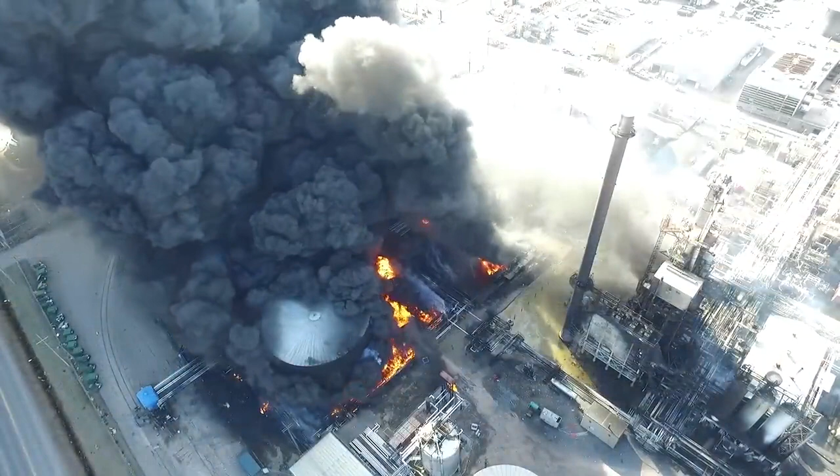April 26, 2018, the Superior Refinery in Superior, Wisconsin. A large explosion erupted during a maintenance shutdown, puncturing a tank of asphalt that spilled into the refinery. The asphalt later ignited, causing a huge fire. The incident injured 36 workers, caused roughly $550 million in damage to the facility, and released 39,000 pounds of flammable hydrocarbon vapor into the air.

Over 2,500 residents of the city of Superior were evacuated from their homes, and the city of Duluth, Minnesota, issued a shelter-in-place order. Refinery shutdowns, as well as startups, can be particularly dangerous because processes are not in normal operation mode. Our investigation found that critical safeguards were not in place during this shutdown, and that the procedures followed at the refinery were not correct.

The result was a massive explosion and fire that injured dozens of workers, caused hundreds of millions of dollars in damage, and threatened the surrounding communities. The explosion and fire thankfully didn't compromise a nearby storage tank that contained highly toxic hydrofluoric acid. But the CSB considers this incident to be a serious near miss involving HF. If hydrofluoric acid had been released, this could have been much worse.

Shortly before 6 a.m. on the day of the incident, operators took steps to shut down the refinery's fluid catalytic cracker, or FCC unit, for periodic maintenance and inspection. The FCC unit uses heat and a solid catalyst to break or crack heavy hydrocarbons from crude oil into smaller hydrocarbons, which can then be blended into gasoline and other products.

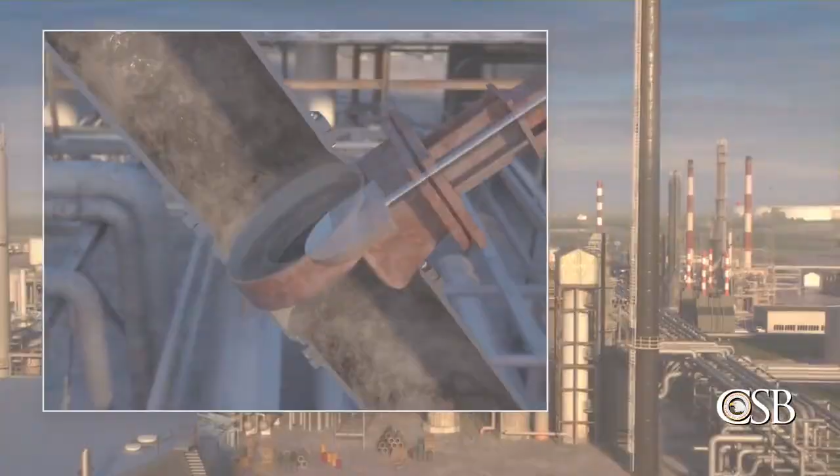To initiate the shutdown of the FCC unit, refinery workers stopped the flow of hydrocarbons to the reactor and closed the two slide valves connecting the reactor to the regenerator. Circulation of the catalyst stopped, but one of the two slide valves was eroded. Catalyst from the reactor fell through the valve to the regenerator, leaving an open path for air or hydrocarbons to flow between the two pieces of equipment.

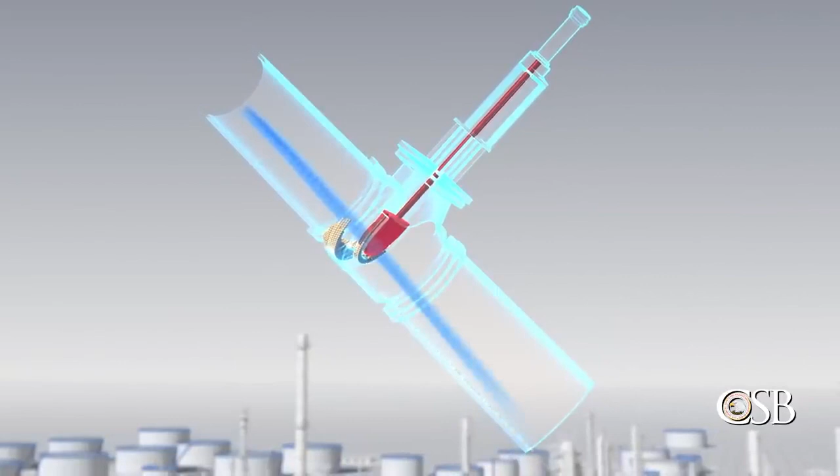Without other critical safeguards in place, air from the regenerator flowed backwards through the slide valve into the reactor. The air then moved into the main column and other equipment downstream of the reactor, where it formed a flammable mixture with hydrocarbons. At approximately 10 a.m., the hazardous mixture of air and hydrocarbons found an ignition source, and there was a large explosion.

Debris from two vessels flew into the air. One piece traveled about 200 feet and hit a large above-ground storage tank, puncturing the side of the tank and releasing hot asphalt. Asphalt poured out of the tank over the containment berm and into the refinery's operating units, where it spread along the ground.

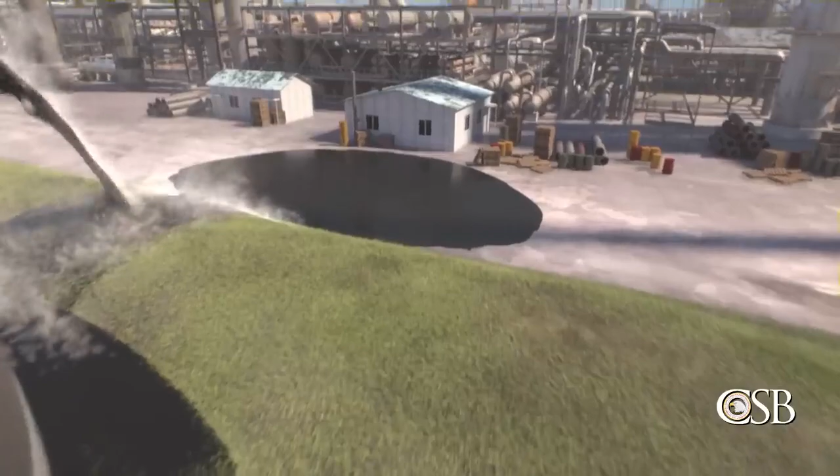At around 12 p.m., the released asphalt ignited at the storage tank and a fire broke out. The fire traveled along the stream of asphalt to the refinery's crude and FCC units. The fire produced a huge plume of black smoke, leading to the evacuation of a portion of the city of Superior. Typically, this type of asphalt fire can burn for days.

A plan to extinguish the massive asphalt fire was developed by the refinery's emergency response team. The refinery began to address the fire together with the Superior Fire Department. They used a combination of dry chemical fire extinguisher and water to attack the fire from multiple directions and surround it within a containment area.

With the fire contained, emergency responders were able to put out the asphalt fire at around 7 p.m. The asphalt fire had been extinguished in a matter of hours, as opposed to days as had been initially anticipated. The evacuation order was lifted, and Superior residents were allowed to return home. Nevertheless, 36 Husky employees and contract workers sought medical attention for injuries.

The Chemical Safety Board launched an investigation and identified 6 safety issues that led to the explosion and fire. They are: transient operation safeguards, process knowledge, process safety management systems, industry knowledge and guidance, brittle fracture during extreme events, and emergency preparedness.

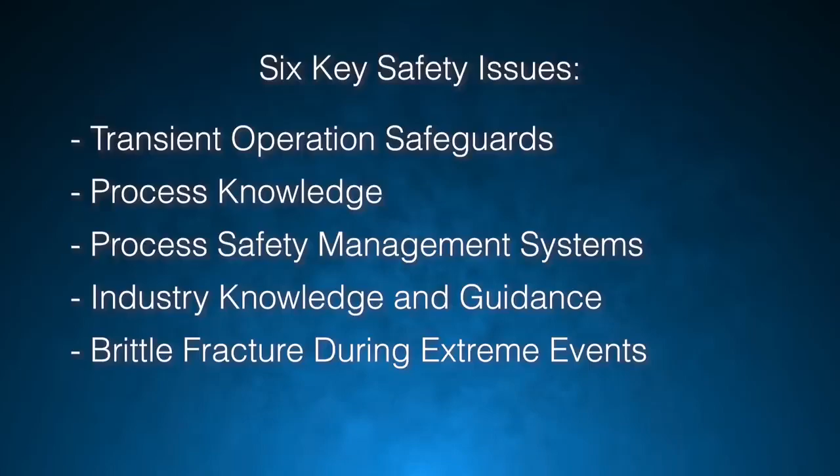The first safety issue is transient operation safeguards. At the time of the incident, the Superior Refinery was shutting down the FCC unit. Shutdowns, like startups, standbys, and emergencies, are known as transient operations, meaning activities that take place outside of normal process operations. Transient operations can pose unique hazards that are not present during normal operations.

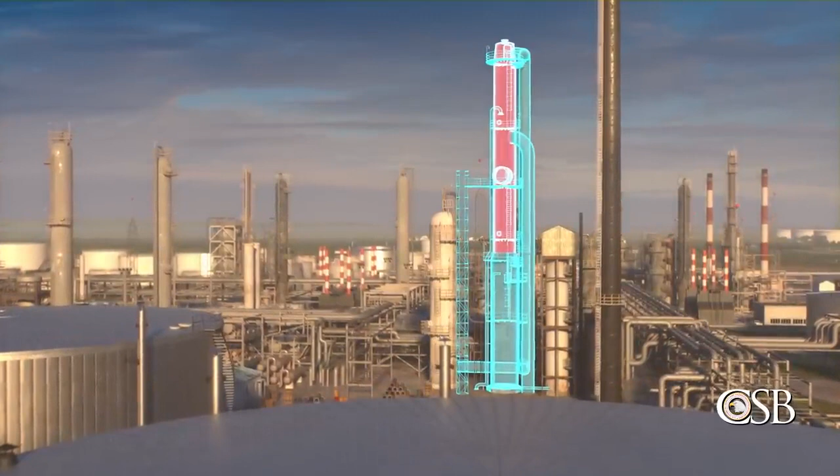An FCC unit presents atypical hazards during transient operations because air and flammable hydrocarbons are present within interconnected equipment, which increases the likelihood of an explosion. Therefore, during the shutdown of an FCC unit, certain FCC-specific safeguards must be in place to ensure that air and hydrocarbons do not mix.

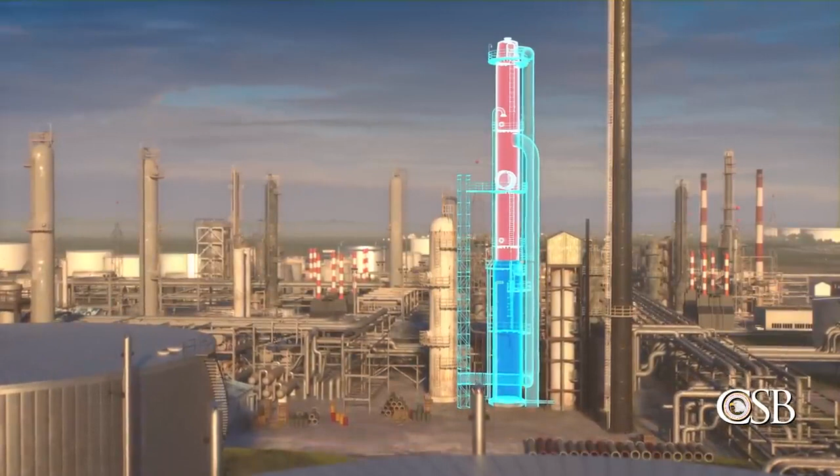The CSB found that at the Superior Refinery, these safeguards were not implemented or were ineffective. One such safeguard is to create a reactor steam barrier. This is done by injecting a large amount of steam into the reactor, creating a higher pressure in the reactor than in the connected equipment. This prevents air from the regenerator from flowing into the reactor, where it can then enter the main column and other equipment on the hydrocarbon side of the process.

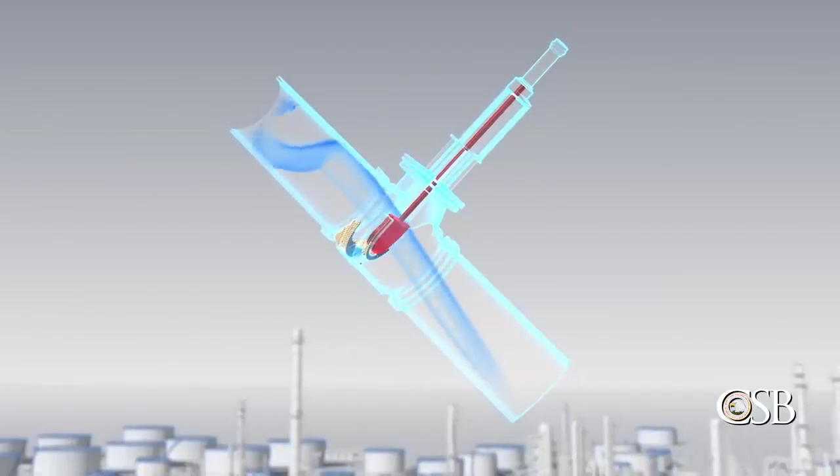However, Superior Refinery's shutdown procedure did not call for a reactor steam barrier, but instead instructed the board operator to maintain the regenerator at a higher pressure than the reactor at all times. Following these instructions set the refinery on a path toward disaster, as this hazardous pressure differential ensured that air from the regenerator would flow into the reactor and onward into the hydrocarbon side of the process, where a flammable mixture formed.

Another critical safeguard that should be in place during an FCC unit shutdown is to use natural gas or nitrogen to purge air from the main column to the flare system to prevent oxygen accumulation inside the equipment. But the CSB found that even though Superior Refinery had the ability to purge air out of its main column, the refinery had not incorporated this safeguard into its operating procedures for transient operations or its operator training program, so it was not done.

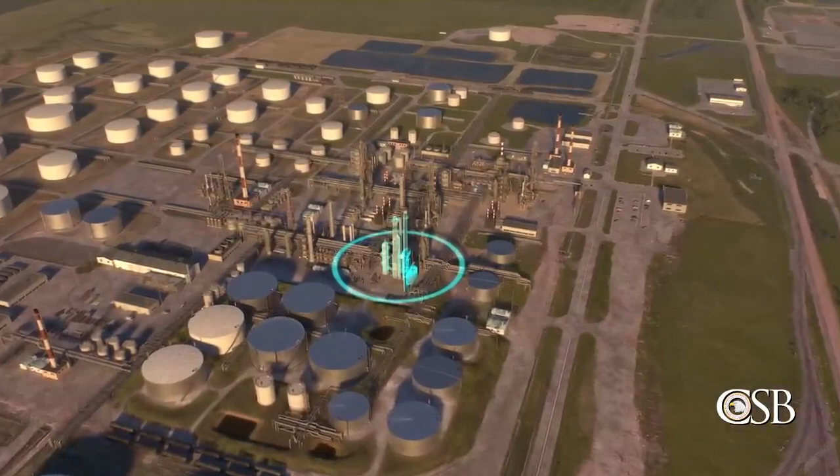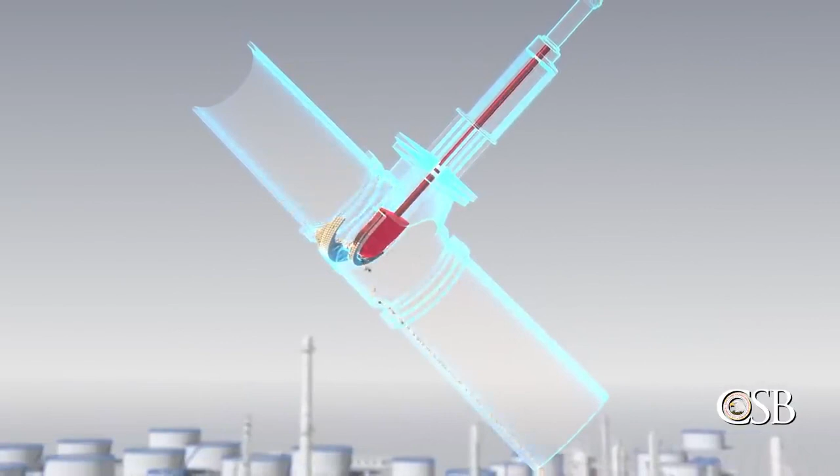Instead, the refinery overly relied on the catalyst slide valves to keep the air and hydrocarbon systems separated during the shutdown. But slide valves are designed to control flow of catalyst during normal operations, not to prevent flow of air and hydrocarbons during a shutdown. And one of the slide valves was eroded after years of use. Therefore, without other safeguards in place, air was readily available to pass from the regenerator through the worn slide valve into the reactor and onward into the hydrocarbon side of the process.

During transient operation for any process involving flammable materials, operators need to understand the potential for air to enter and accumulate inside equipment. Written procedures should be in place that outline safeguards meant to prevent air and hydrocarbon mixtures, and operators should be trained to understand why those safeguards are critical.

To that end, the CSB made a recommendation to the new owners of the refinery, Cenovus Energy, to establish safeguards to prevent explosions in the FCC unit during transient operation and incorporate these safeguards into written operating procedures.

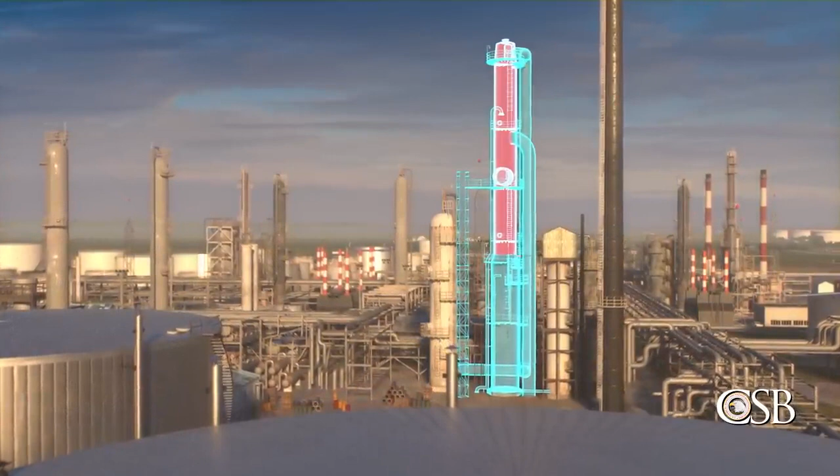The second safety issue found by the CSB is process knowledge. The CSB found that throughout the history of the Superior Refinery, under several owners, its FCC expertise was mostly in-house and with minimal engagement with other refineries. In addition, the refinery's use of external technical experts was limited to assessing the FCC unit's performance during normal, not transient operations. The Superior Refinery required its operations department to review and recertify its operating procedures annually.

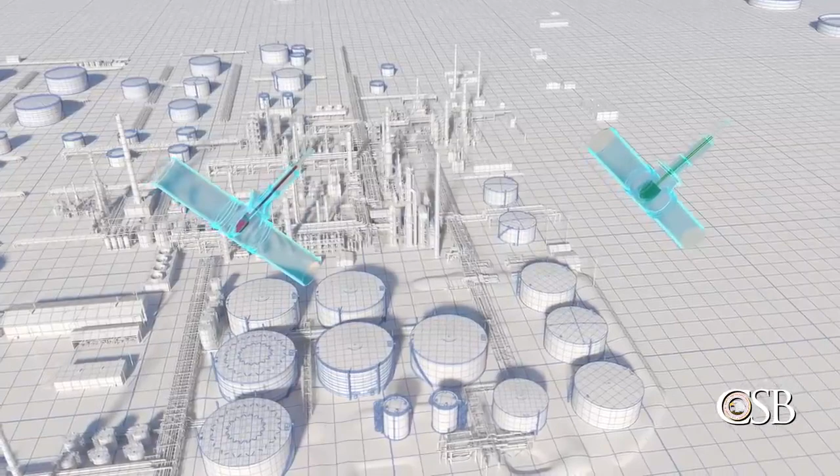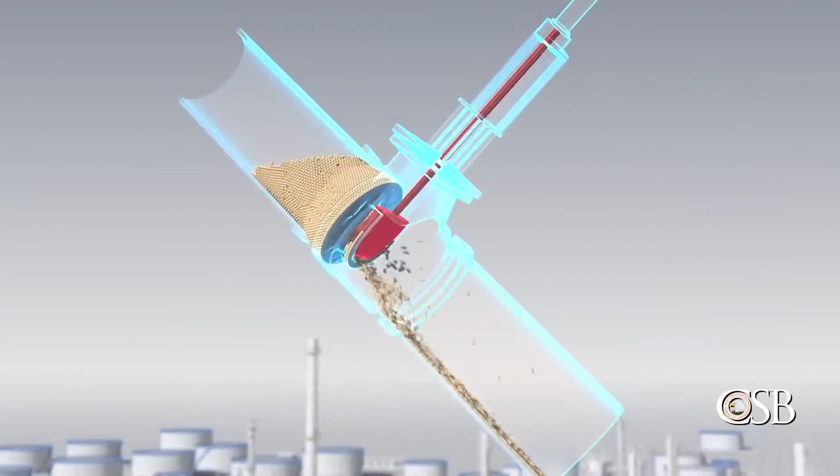But the refinery had not performed a technical review of its FCC unit operating procedures with its process engineers, the FCC technology licensor, or outside consultants for at least 25 years prior to the incident, and possibly since the unit was commissioned around 1960. As a result, the refinery's shutdown procedures, which instructed operators to maintain the regenerator at a higher pressure than the reactor at all times, directly contradicted the FCC technology licensor's guidance and created the dangerous condition that enabled the explosion to occur.

The Superior Refinery had serious errors in its FCC unit operating procedures that directly led to the explosion. But refinery employees did not have sufficient process knowledge of FCC unit technology to recognize the problem. Had the refinery engaged with other sites or outside experts to review its operating procedures, the technical errors could have been identified and corrected, and the explosion could have been prevented.

Therefore, the CSB made a recommendation to Cenovus Energy to develop and implement a technology-specific knowledge-sharing network program across all Cenovus-operated refineries, which at a minimum includes an FCC technology peer network.

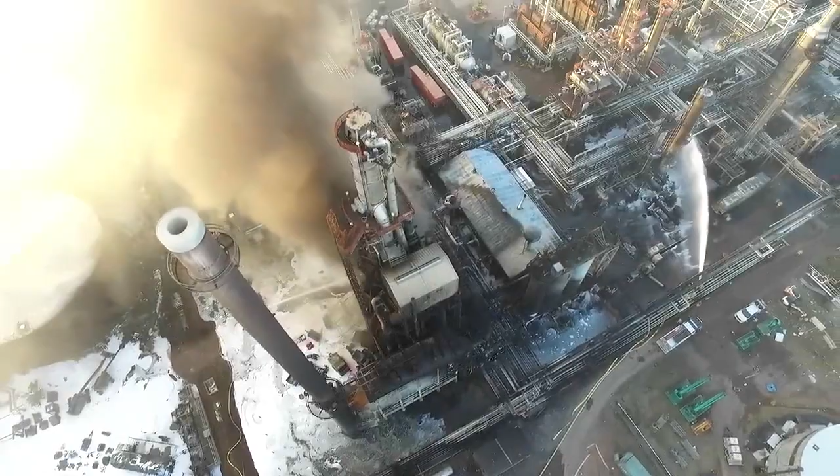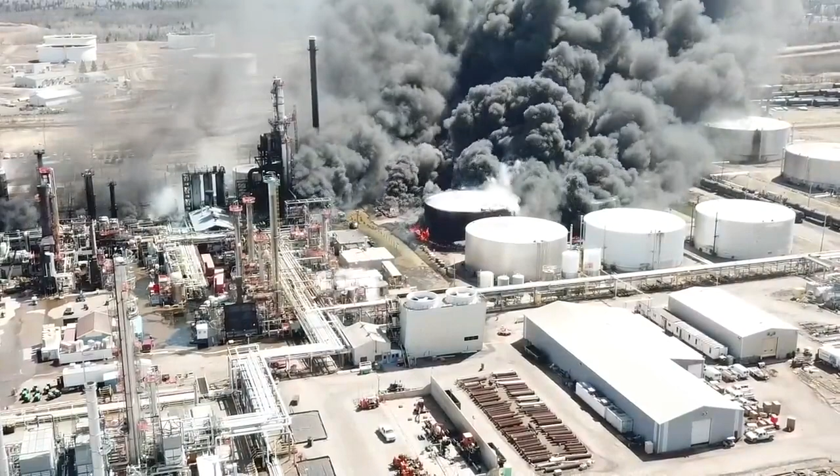The third safety issue highlighted by the CSB is process safety management systems. OSHA's Process Safety Management Standard and the EPA's Risk Management Program rule require facilities like the Superior Refinery to implement process safety management systems. Process Safety Management, or PSM systems, are meant to identify, evaluate, and control process hazards. But the CSB found that the refinery's PSM systems were inadequate.

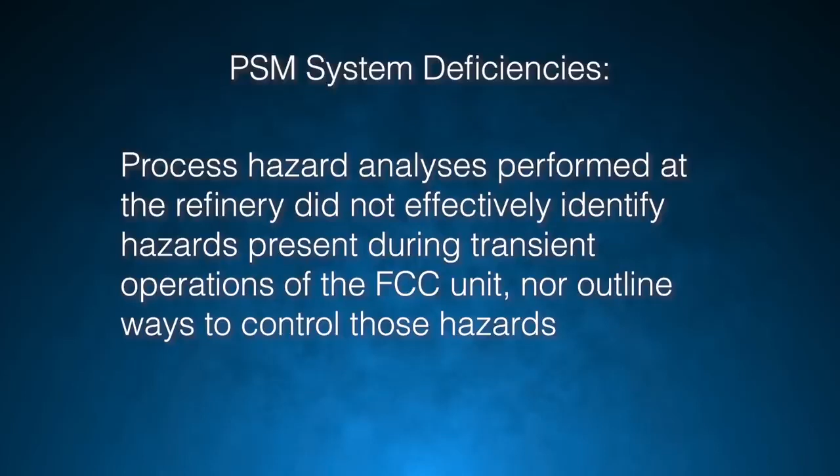For instance, the refinery's process safety information did not include the operating manual published by the FCC technology licensor. Process hazard analyses performed at the refinery did not effectively identify hazards present during transient operations of the FCC unit, nor outline ways to control those hazards. The refinery's operating procedures lacked clear instructions and were not technically evaluated. And the operator training program at the refinery did not properly prepare operators to shut down the FCC unit safely.

The deficiencies we found in Superior Refinery's process safety management systems directly contributed to the explosion. To prevent catastrophic incidents, companies should ensure that their PSM systems are effective at identifying, evaluating, and controlling process hazards, not just during normal operations, but during transient operations as well. As a result of its findings, the CSB made a recommendation to OSHA to develop guidance documents for performing process hazard analysis on operating procedures to address transient operation hazards in facilities with PSM-covered processes.

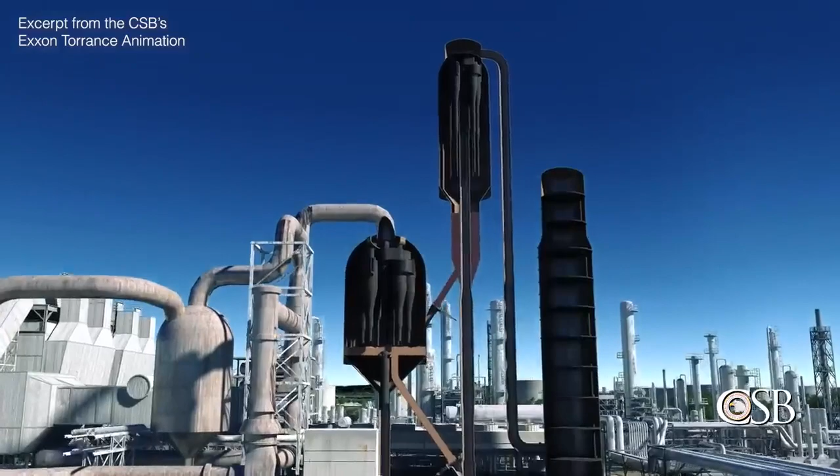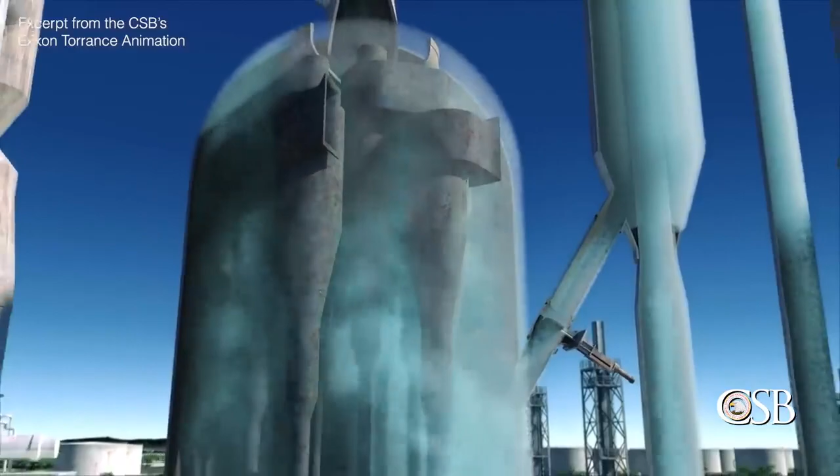The fourth safety issue found by the CSB is industry knowledge and guidance. The explosion at Superior Refinery occurred less than 1 year after the CSB released its report on a similar explosion at the ExxonMobil refinery in Torrance, California. Industry trade groups distributed lessons learned from the California incident, as well as the CSB's safety video on the explosion. But despite these educational efforts, employees at the Superior Refinery did not learn or apply these key lessons in a way that could have prevented the explosion at their refinery.

For example, the workforce appeared to understand that flammable hydrocarbons had flowed from the California refinery's main column into the regenerator and subsequently exploded. But they did not recognize that the reverse was also possible. Therefore, they did not realize a similar explosion was preventable by implementing a reactor steam barrier.

In addition, there is currently no industry publication that establishes common basic process safety expectations for all FCC units. Although the refining industry has accumulated many years of FCC process safety knowledge from its members, this information is scattered, complex, and not easily accessible to some refinery employees.

The CSB believes that a publicly available technical publication outlining recognized and generally accepted good engineering practices for safe FCC operation and incorporating lessons learned from this and other similar CSB investigations could help drive important safety improvements in FCC units across the United States. Therefore, the CSB made a recommendation to the American Petroleum Institute to develop a publicly available technical publication for the safe operation of FCC units that is applicable to both new and existing units.

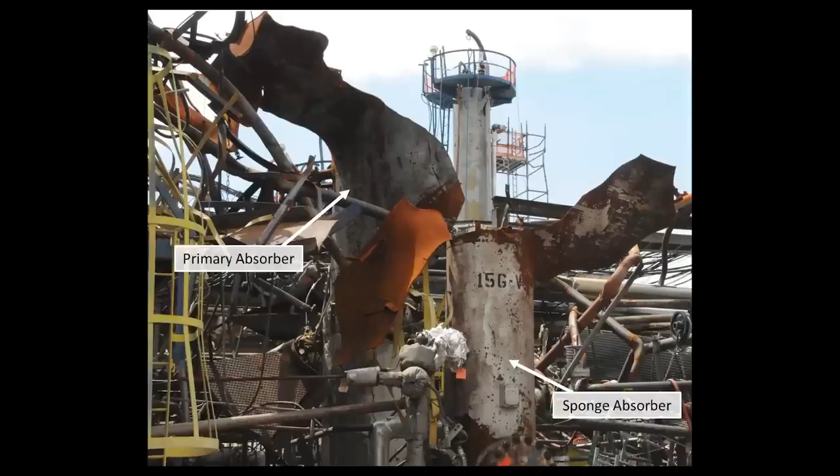The fifth safety issue outlined by the CSB is brittle fracture during extreme events. The two process vessels that exploded were constructed from a grade of steel that is no longer recommended for new equipment. The vessels failed by brittle fracture, which means that they shattered like breaking glass. When the vessels failed, the force of the explosion sent over 100 metal fragments from the shattered vessels around the refinery.

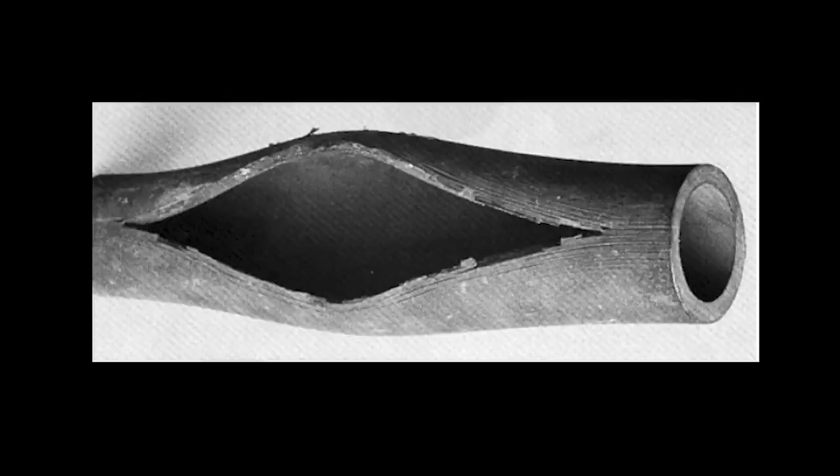One large piece struck and punctured the nearby asphalt tank. Had the process vessels been made of a new grade of steel with better toughness properties, they would have more likely torn open rather than shattered, resulting in fewer, if any, dangerous projectiles.

While some vessels may be deemed fit for service, they're not usually assessed for their performance during an explosion. Selecting materials of construction that are not susceptible to brittle fracture can help lessen the impact to the surroundings should an extreme event occur.

The sixth and final safety issue noted by the CSB is emergency preparedness. The Superior Refinery uses highly toxic hydrofluoric acid, or HF, in its alkylation process. The HF storage tank was about 150 feet away from the two vessels that exploded, which is about 50 feet closer than the asphalt storage tank that was damaged. The HF tank was not punctured or otherwise compromised, but the CSB considers this incident to be a serious near-miss event with hydrofluoric acid.

Explosion debris did, however, puncture the asphalt storage tank, causing over 17,000 barrels of hot asphalt to spill out into the refinery, where it accumulated for approximately 2 hours before it ignited. It was only a matter of time until the spilled asphalt caught on fire. Had emergency responders treated the asphalt as a flammable liquid, they could have taken more effective action sooner to control the asphalt spill before it ignited.

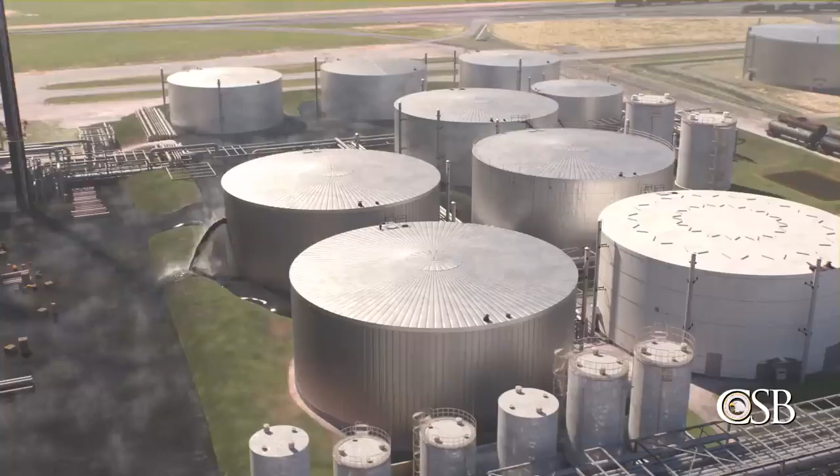The result is that the initial explosion escalated into a large fire that caused hundreds of millions of dollars in property damage. In addition, smoke from the fire and the potential for an HF release prompted the City of Superior evacuation order, causing disruption to over 2,500 members of the surrounding community. The refinery remained shut down for more than 4 years following this incident.

In response, the CSB made a recommendation to the EPA to develop a program that prioritizes and emphasizes inspections of FCC units in refineries that operate HF alkylation units to verify that safeguards that prevent explosions during transient operations are in place. The incident at the Superior Refinery should serve as a wake-up call to other refineries, especially those that have hydrofluoric acid alkylation units.

During transient operations like shutdowns and startups, refineries must have necessary safeguards in place and follow correct procedures to prevent disasters from occurring. Thank you for watching this CSB safety video.